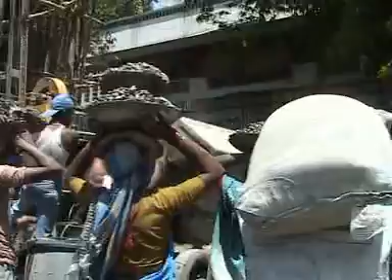As a part of this industry, you will be involved with the development and maintenance of a country's infrastructure that requires the combination of manpower and materials to get the work done. It embraces a wide range of materials and components such as bricks, tiles, cement, aggregates, etc.

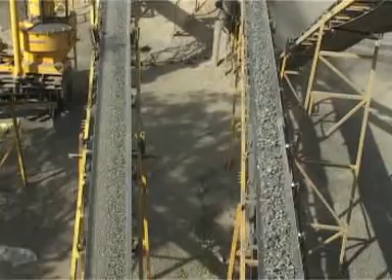Stone, metal or aggregates is one of the important building materials which are manufactured by processing the big stones from mines and crushing them to desired sizes. As per quality specifications, they undergo process of primary, secondary and tertiary crushing. Compression crushing and cleavage crushing are the most commonly used technologies for this purpose.

In compression crushing, the material is crushed by applying force on it from outside, which results in flaky material. Whereas in cleavage crushing, the particle energy applies the force from inside of material and splits it. Thus, the material gets crushed at the weakest sections, resulting in cubical or spherical shape.

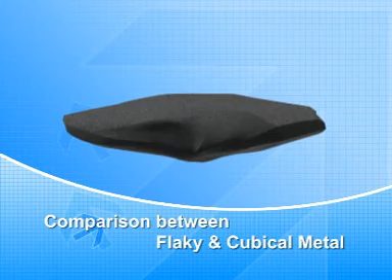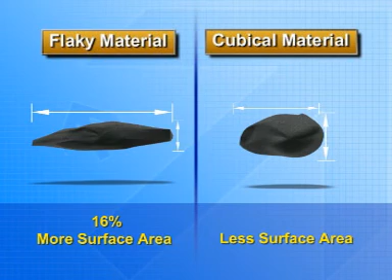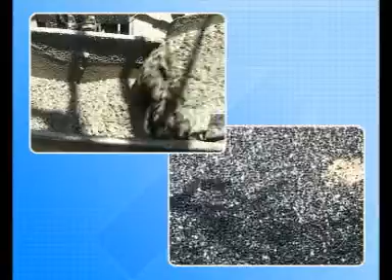Flaky material means chip of the stone having more length and width compared to thickness. It has approximately 16% more surface area than the cubical material for the same volume or weight of the particles. That is why, while making cement concrete or asphalting, more amount of cement slurry or asphalt is consumed to fully coat the flaky material from all sides.

With flaky material, the thickness of cement or asphalt layer over stone metal decreases. So cubical metal can achieve more compression strength for the same cement or asphalt consumption. Also, cubical metal helps in maintaining water-cement ratio. As well, in concrete, flaky material has more voids than cubical material. We can prove this with a simple experiment.

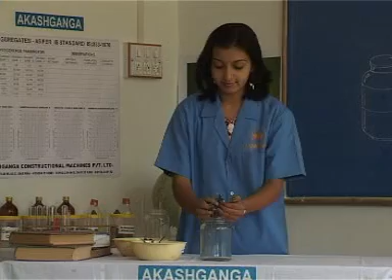Here we have taken two empty glass bottles of same volume, flaky and elongated material which is represented by nails and cubical metal which is represented by marbles in this case. We are putting the nails in the first bottle. We are shaking the bottle so more nails can fit in. You can observe we are trying hard to fit more nails in the bottle. But it is not possible as more voids have been formed due to the elongated shape of the nails.

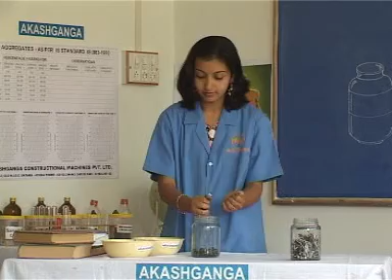Now we are going to put marbles in the second bottle. You can see that it is easier to fit in more marbles in the bottle than nails even without shaking. This is feasible because of their spherical shape. Secondly, voids formed are few in number and are of smaller size compared to those formed with the nails.

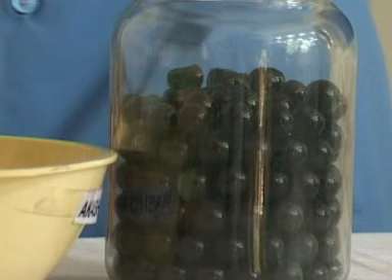This simply proves that as your metal becomes flakier, more voids will form and more amount of cement slurry or asphalt will be required to fill in. But as your metal becomes more spherical, the voids formed will be less, resulting in reduced consumption of cement slurry and fine aggregate. We will better understand the same with actual flaky and cubical metal.

Let's check out. Here we have empty glass bottle, samples of flaky and cubical metal, and an electronic balance. We are simply filling the empty glass bottle fully with flaky material. And we'll see how much it will weigh. Also keenly observe how the flaky particles have got fit in the bottle. Okay, we will note the reading.

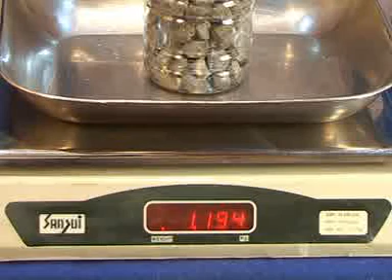Now let's fill the same bottle fully with cubical metal. Keenly observe how the cubical particles have adjusted themselves in the bottle. Here you can see the voids are less in number and of smaller size compared to voids created previously. Now we will weigh the same bottle and note the reading.

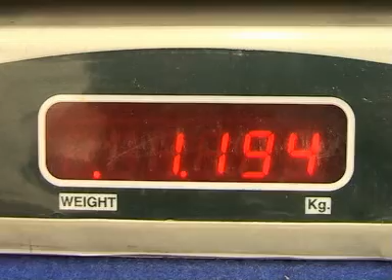Oh, with cubical metal, the weight of bottle is more compared to that with flaky material. This happens simply because in the bottle more voids have been formed with flaky material compared to cubical metal. The same happens in the concrete too.

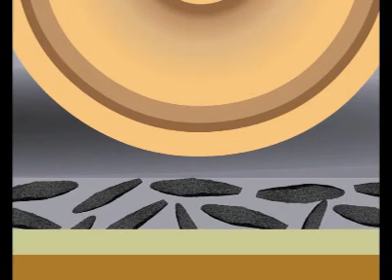It has been observed that while rolling during construction of roads, the flaky material may break and the broken surfaces do not carry asphalt coating. This results in weak sections and finally reduced road life. So, considering the quality of country's infrastructure, Ministry of Road Transport and Highways, that is MORT&H, National Highways Authority of India, that is NHAI, and International Standards Organization, that is ISO, call for combined flakiness and elongation index of less than 30%.

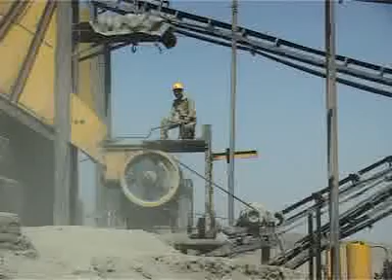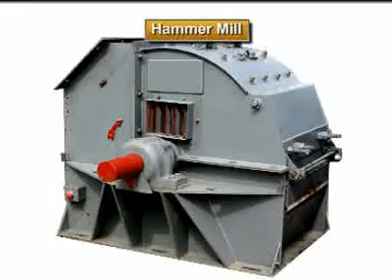During secondary crushing, jaw crusher, cone crusher, and roll crusher, which work on principle of compression crushing, produce low-quality flaky material. Whereas VSI crusher, which works on principle of cleavage crushing, produces high-quality cubical material. Horizontal impactor and hammer mill are also used in secondary crushing.

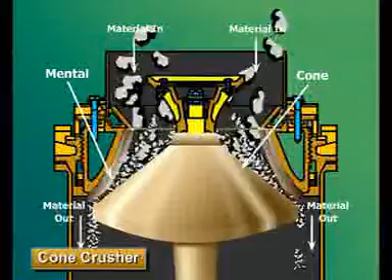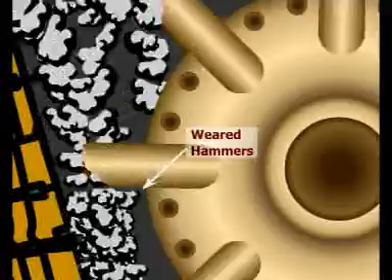But the jaws in jaw crusher, blow bars in horizontal impactor, cone and mantle in cone crusher, rollers in roll crusher, and hammers in hammer mill wear out quickly as force is applied against the compression and abrasive force between grains of the material. For example, this is a new hammer used in hammer mill. You can observe that it has got worn out heavily in only 4 hours when used for quartz crushing.

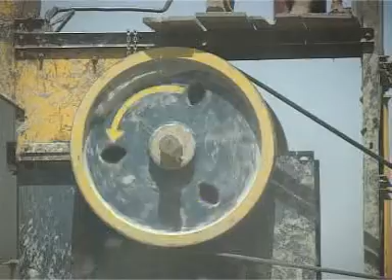Thus, the worn out parts demand quick replacement and more maintenance. Finally, using such technologies, your wear cost goes on increasing throughout the production process. In addition, the production won't be efficient because of longer breakdown times.

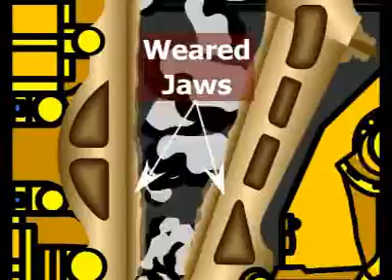In these types of technologies, as time spans, the working parts get worn out more and more, and the gradation quality starts differing more and more. So it becomes more difficult to keep control on shape and size of the produced material. As well, the uneven wearing of parts may cause mechanical problems.

In short, with such technologies, it becomes very difficult to cater to the industry demands of different size material with good shape and reasonable strength. So, as a construction professional, vertical shaft impactor, that is VSI, will be the perfect crushing technology for you.

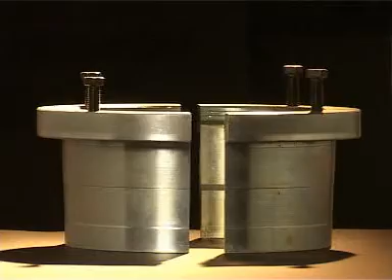We are dealing in construction machines. Our machines are having very unique design. We select proper material. Our engineers are very expert in that. They know each and every property of the material. So that is the main thing in our design. It should be ergonomically suitable. Its look must be very nice. All these things should be considered while designing.

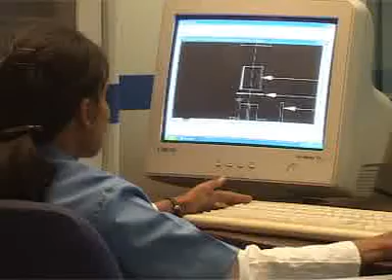So this machine can be used to crush any hard material like quartz, any abrasive material like cement clinker, blast furnace slag, electric furnace slag. And with this criteria especially, it is used as a pre-grinder also. At Akashganga, we have state-of-the-art design department inclusive of the leading-edge work of our top designers. The main task of design department is rapid and effective familiarization with new technologies as well as the transfer of know-how to the company.

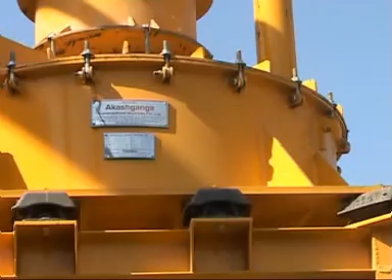VSI crushers manufactured by Akashganga are the best to prove their passion about technology. It is operated with single or dual motor. Dual motor helps in reducing the starting current. The material is fed from top and crushed product comes out from bottom. Before material enters feeding chute, a magnetic separator separates tramp iron from fed material and thus protects the rotor and other parts against damage.

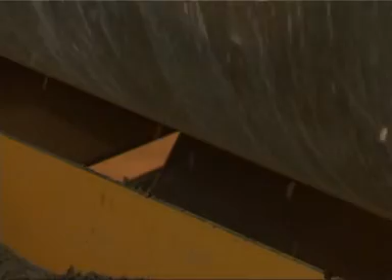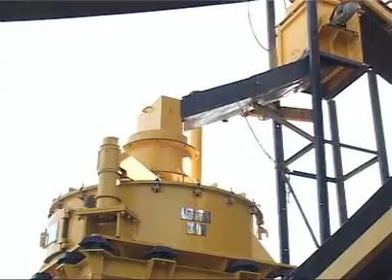To get the good shape, it is the best practice of allowing the rock to break on its natural cleavages under free impact conditions. In VSI, the stone which is to be crushed is fed through hopper and a feed tube onto the center of a closed rotor. As it passes over the central distributor cap of rotor, it is divided into multiple separate streams. The rotor spinning at high speed of 60 to 85 meters per second throws the material with a great centrifugal force and forms rock shell of good shape.

As the accelerated rock strikes the rock shell, known as rock-on-rock principle, it breaks by impact along the weakest section, resulting in cubical-shaped product. The crushed product produced by this principle is guaranteed that it will not have any weaker sections or any fine cracks. While breaking on rock shell, the pieces are hit by the rock particles which are following, thereby maintaining a continuous reduction stream of high energy collision.

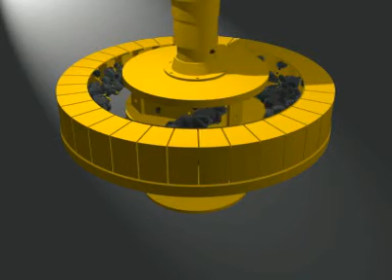Finally, when the stone particles lose their kinetic energy and overcome the force of the rock flow over them, they fall freely by gravity onto a conveyor belt below. The surface texture of produced particles is also more finished than the other ones as multiple collisions of stone particle is taking place inside the crushing chamber. This action is simulating the natural eroding of the particles in river.

To simulate this action, we have made few mud balls. We will see what happens when we throw them on a wall. Oh, it has got split into smaller particles. Now we will throw more balls on the wall. Nothing new is happening here. As you can see, every time the ball is striking the wall, it is breaking comfortably.

But if you observe keenly, you can understand that when we are throwing the ball towards the wall, we are imparting kinetic energy on it. But suddenly, at the striking surface, that is wall, in this case, it gets stopped. So, the kinetic energy inside the particle blasts the ball and breaks it in finer particles. The same principle is used in VSI crusher to break the stone.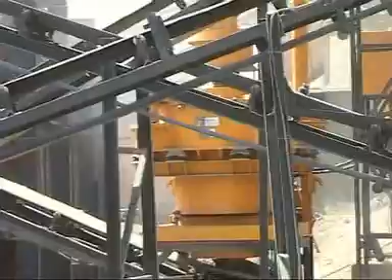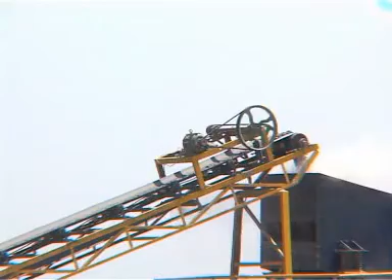The machine is designed in such a way that all the pathway through which stone stream flows gets automatically tough stone lining. So no metal part comes in contact with stone material. They get protected from heavy wear. This also avoids the contamination of iron in crushed product.

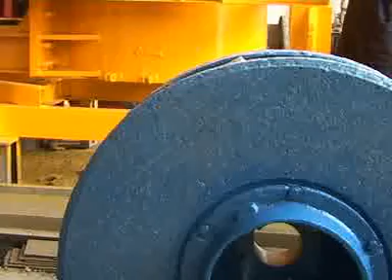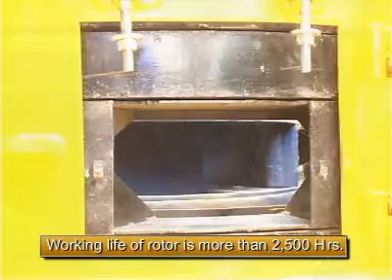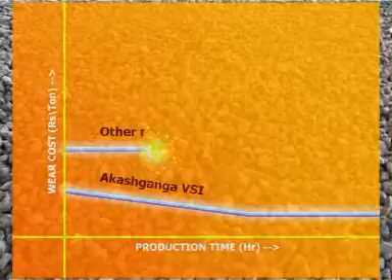Unique design technology of our rotor offers you a wide variety of applications. All the wear points are covered with special wear plates. Especially the edges of ports are provided with highly wear-resisting material. Hence, estimated life of our rotor is more than 2,500 working hours. With Akashganga VSI, there is no effect of wear on quality of particles produced. You can operate it with negligible wear costs. The graph is showing wear cost comparison with other machines.

We would like to express our sincere appreciation to Akashganga for developing such wonderful technology. With our VSI, we are able to supply same size and shape material for longer durations with negligible breakdown times and negligible wear cost. Our customers are delighted as we fulfill their demands of varied size material of good quality with good strength and without any delay.

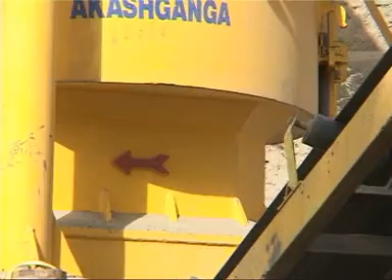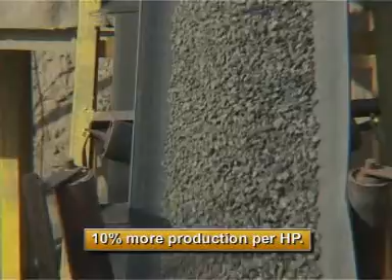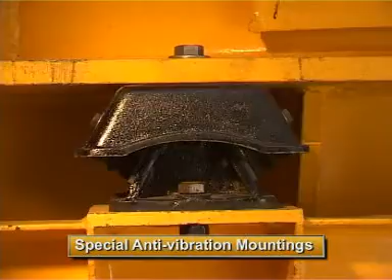Consistency in performance of VSI crusher is one more feather in its cap. The specially designed bearing capsule, main shaft and its fitment do not require dismantling of bearings. As the main shaft is made from special steel, its fatigue life is also more. Our machine results in 10% more production per HP. You can crush feed size from 0 to 40 millimeters. Anti-vibration mountings in the machine increase the fatigue life of other parts of the structure.

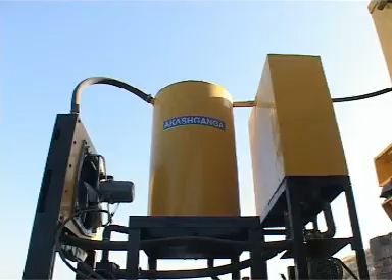It's a way of thinking and working that has grounded our performance for decades. Our foolproof oil lubrication system beats all other crushing machines and ensures you improved workability compared to conventional grease lubrication. Because of the oil pump, better lubrication of bearings is possible.

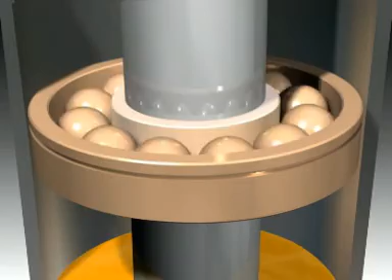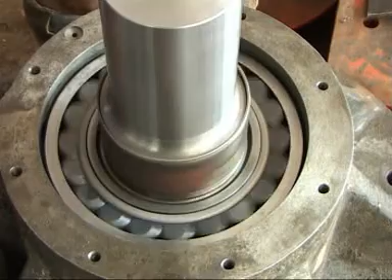During crushing, circulating lubricant oil carries away the heat generated in the bearings, which is again extracted from oil in a heat exchanger. As well, special oil floating design of bearings counterbalances the weight of shaft and rotor, so frictional losses are negligible here. As a whole, life of bearing increases by 3 times compared to the other machines, and estimated bearing life is 10 years.

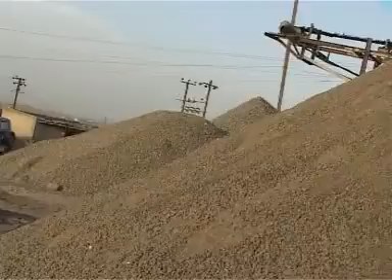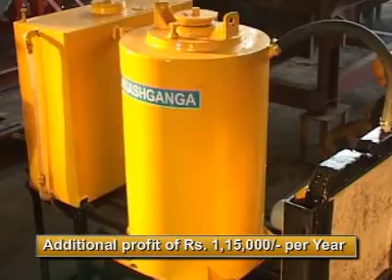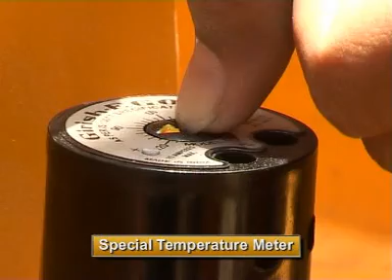It is the best that no time is wasted in lubrication and that can be utilized for efficient productions. If you follow the guidelines, our machine can run around the clock for you without any interruption. Thus, you can raise the profits by 1,15,000 rupees per year compared to grease lubrication. The machine is facilitated with special temperature meter and control unit which helps you in maintaining the temperature of the bearings and protect them from overheating.

I am very pleased with my VSI. Since I purchased it from Akashganga in 1997, I don't remember that any day I had shut down my plant because of lubrication problem. The way it is designed is so well and easy to approach. I am thrilled with its ongoing performance. I am able to run my plant in full swing with longer bearing lives and good profitability. It is a pleasure doing business with Akashganga.

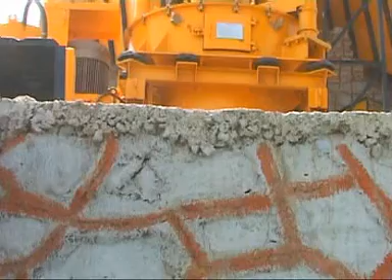A crusher is a human-operated machine and an example of man-machine systems. Clearly, every such system is required not only to have the basic performance of crushing, but also to provide comfortable working, responsive handling, and active safety of operators. Our VSI has proven itself as a user-friendly VSI crusher.

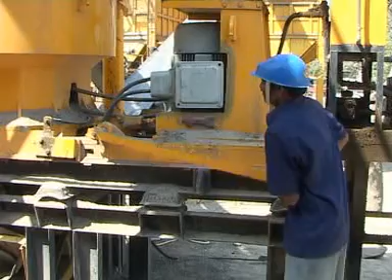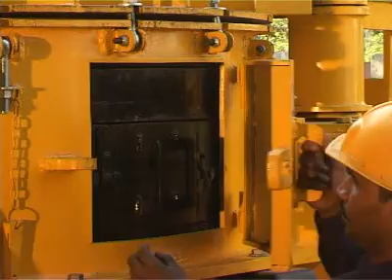For maintenance purpose, a spring-loaded top lid with 360 degrees swiveling against a pivot is provided, which can easily be opened within no time by a single operator. No crane is required here. The tension of driving belt can easily be adjusted with the handle provided near the driving motor. For periodic inspection, an inspection window is provided to inspect the rotor and crushing chamber. This helps to take any corrective action rapidly.

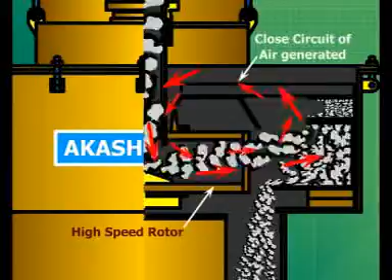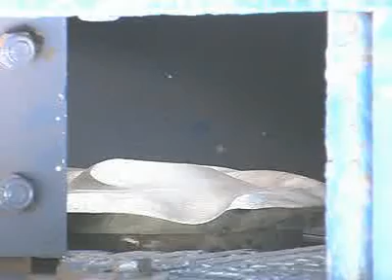With the help of the hour meter, the actual running time of the machine can be judged. The air generated due to the high-speed rotor is diverted and circulated in a closed circuit, so less dust emits from the outlet. Along with VSI crusher, we offer accessories for sand making plant like vibratory screen, dust separating system, and mist spray system, which improves the performance level of the plant. In our design, parts can easily be changed with nut and bolt technology on the plant itself within negligible breakdown times, and their replacements do not require balancing.

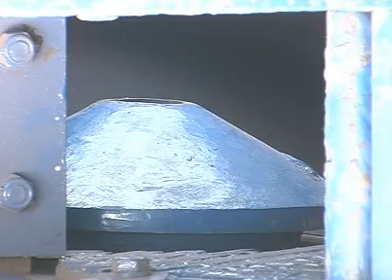We are a leading manufacturer of hollow and solid cement concrete blocks and interlocking pavers in Western India. Being pioneers, we started this business in 1985. In 1995, we discovered that we are at the mercy of the sand suppliers who often stop supplies for some flimsy reasons. The quality and the quantity were not available as per our requirement. We sourced a Canica vertical shaft impactor from USA. The machine worked successfully for 5 years, but then we found that the cost of consumable spares was coming very high, and import problems and all the formalities were very cumbersome.

It is then that we found that there is a company by the name of Akash Ganga in Satara who are manufacturing a similar machine. We took one machine from them in 1999-2000. The machine ran very successfully for 5 years and it is still running in our Palghar unit. When we came up for expansion in 2005, that is the time we took the second machine from Akash Ganga. We also got our American machine modified by Akash Ganga so that the consumable spares and the lubricant system are much better than the original machine. This machine, the second machine, is also running very successfully at our plant.

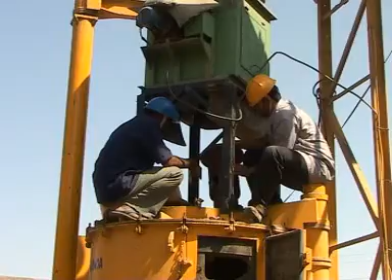During the course of our association with Akash Ganga from 1999 till date, we have been extremely happy with their service and spares. We wish Akash Ganga all the best in future and hope to receive the same quality of cooperation and service from them. Not only the best designed machine and its successful installation will perform for you, but also its good knowledge and good utilization are equally important. After the installation, our service team will take good care of it.

We follow strict quality control while manufacturing. We are giving 3 years guarantee regarding our machine. If any problem is there, maybe minor problem, some oil leakage or something like that, we give our mechanic services within 24 hours after receiving the call. In our machine, we have used such material which is having very high efficiency and very less abrasiveness. That's why we get very less wear cost of our machine.

Each and every part of our machine is well balanced within few grams. So machine runs very smoothly. All these special qualities of our machine and better performance is not a job of one person. Everybody is responsible and doing his duty with much responsibility, and that is the reason we are getting a good quality machine. And moreover, we keep complete record of the performance of the machine. We call it a history card.

In that history, each and every part, which part we have supplied, where it is purchased from, what is the grade of that material, everything is mentioned. So that helps us in further development also. This also gives us the complete idea how that machine is running. The smallest life for the wear part we are giving is 2500 hours. Some parts we are giving guarantee for 5000 hours. Our machines can work around the clock for 24 hours, even 300 working days a year.

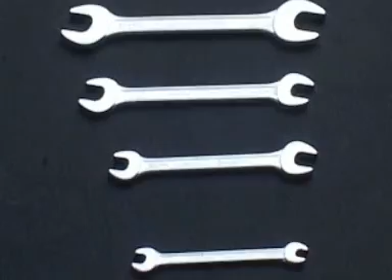A special toolkit is offered along with the machine, with which the operators can do quick repair and maintenance of the machine. Our service engineers do periodic inspection of your machines to ensure their high efficiency and output. We train your operators on the plant for improving crushing performance of the machine. We also prevent you from making a VSI mistake and becoming a VSI victim.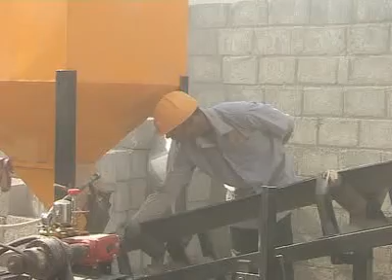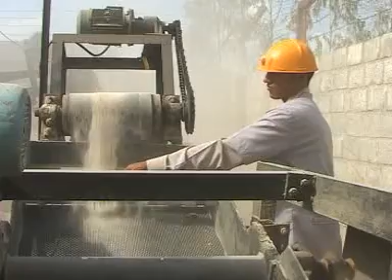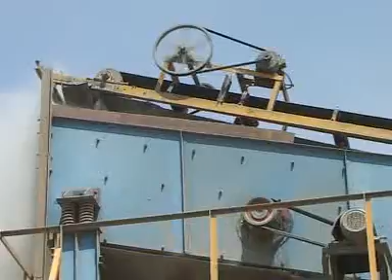At Akash Ganga, we have the facility of actual crushing on the lab model. You can crush your samples on it, and with our lab results, you can get complete idea and analyze the crushing and particle shape. Our lab model is designed so sound that by crushing samples of the material, significant facts can be learned for predicting the power consumption, wear costs, and the performance of the machines at full capacity with acceptable accuracy.

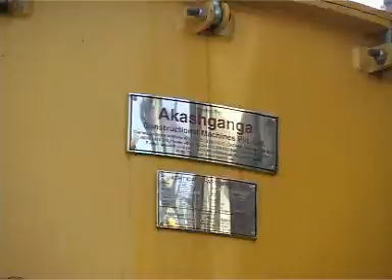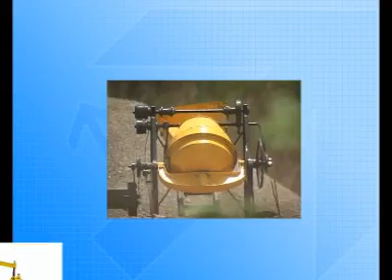Akash Ganga has proven the application of VSI crusher on aggregates and sand from all types of stone like basalt, dolomite, flint, gabbros, garnet, granite, gravel, gritstone, limestone, phosphate, pumice, quartz jasperoid, quartzite, sandstone, silica stone, siltstone, etc. Apart from VSI crusher, Akash Ganga has its technical inventions in cement mixing unit, cement block making machines, etc.

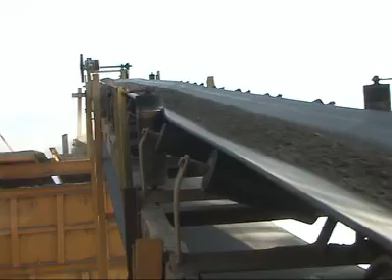Superior particle shape, consistent gradation, and low maintenance costs have helped our VSI crushers to extend our roots from construction industry to chemical industry. Lower noise levels, dust-free operations, and wide variety of crushing applications have increased demands of our VSI crushers in the chemical industries.

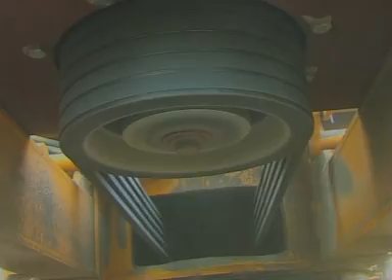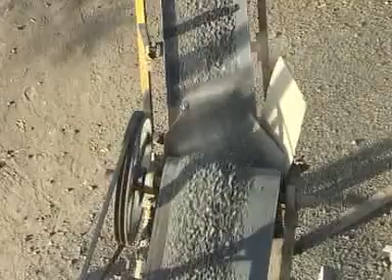With the special design of the machine, you can run it at linear velocity up to 85 meters per second and more, which facilitates crushing of any hard materials like quartz, feldspar, and gabbros, etc. to fine particles. This also facilitates to crush more friable minerals and highly abrasive materials too.

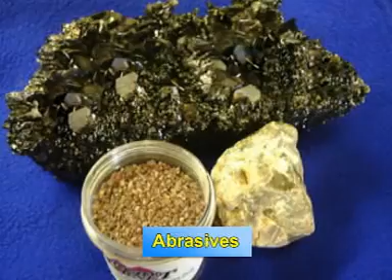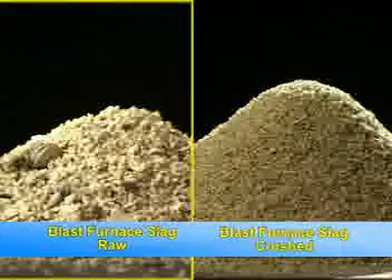We have proven applications on industrial minerals like quartz, quartzite, quality sand, tungsten, ceramics, abrasives, cement clinkers, manganese ore, iron ore, etc. and industrial waste like glass, blast furnace slag, electric furnace slag, refractory bricks, aluminium oxide, and construction waste, etc. for recycling purposes with minimum wear.

Truly, Akash Ganga is uncovering the technological breakthroughs that will change the landscape for the construction businesses. Horizontal centrifugal crusher, that is HCC, is one of their forthcoming technologies which can be broadly used in crushing purposes instead of cone crushers or secondary jaw crushers. We are obsessive in our pursuit of the next breakthroughs. We are diverse and international exporters. Our goal is to develop the technical breakthroughs that will enable our customers to differentiate themselves in the market and win with their clients.